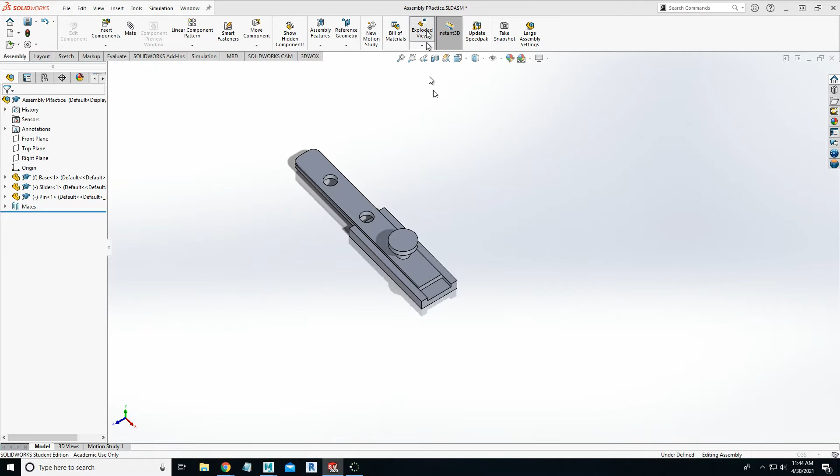So to get started, I'm going to go ahead and click Exploded View, and that'll bring up your menu over here on the left-hand side with all of your options. I'm going to start with the pin. Once I click on it, it'll turn solid blue, and you'll notice I get a triad with it. I'm going to grab the letter Y arrow and move up to where it's just barely above the surface, because that's the easiest direction to show which direction the pin is going to go in.

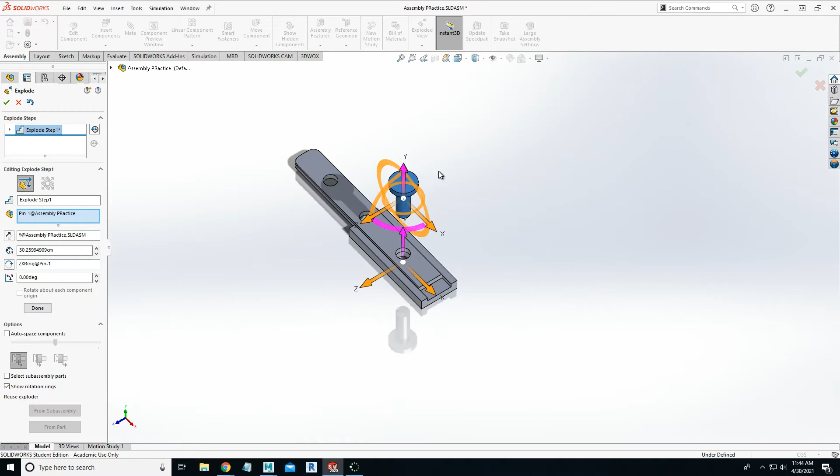Once I finish that step, I'm going to right-click and click Done with Step. That'll end it and add it to my list, and then I can select the slider. So now I'm going to click that slider, and this time I'm going to grab the X arrow, move that down this way, and once again move it just barely off the surface of the original base part. Once I'm finished with that, I'm going to right-click and do Done with Step.

So now I have 2 exploded steps, one for the pin and one for the slider. If I have multiple parts, I'll probably want to do one of these steps for each of those parts. The only one I wouldn't want to do that with is the base. So I'm going to go ahead and click the check mark here. That's going to set it, and then I'm ready to go.

I do need to have some lines though, so I can see where these things come back to, since I'm going to be putting this into a 2D drawing. So I'm going to switch over here on the left-hand side to this configuration manager, which is like 2 little white boxes attached by a vertical line. When I click on that and open up the default assembly, I can see my exploded view.

If I right-click on that, I can add Smart Explode Lines. It's going to go through and show me exactly where those things are going to go. If I like what they are, I'm going to go ahead and click the check mark and set OK, and it'll draw dotted lines to show me exactly where things move. So this piece will slide along this dotted line, and this piece will slide along this dotted line.

Now that I've got that, I can go ahead and click the Save button, and I can move into making my drawing that I can submit. So I'm going to go to File. I'm going to make a drawing from assembly.

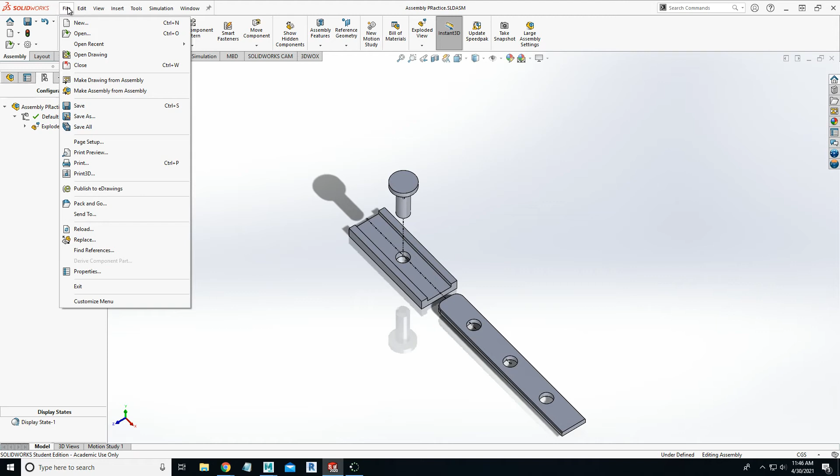Once again, if you don't see this menu at the top, there's probably a little arrow here that you can click until you see the word File, and then make a drawing from assembly. We are going to make sure that this only show standard formats is checked. If yours is not, go ahead and check it now. We're going to choose A0 in the ISO and go ahead and click OK.

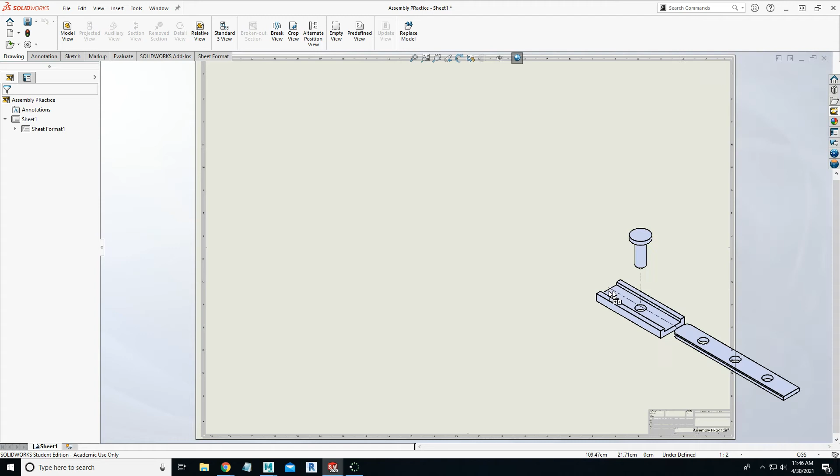And then the one that we want is this isometric exploded down here in the lower right. So I'm going to click on that and drag it out to the page. And then I'm going to place it on the page. It does not fill the page. It's not very good. It's not a good set.

So I'm going to use a custom scale. Right now it's set 1 to 2. Let's try 1 to 1 and see what happens. That's a little on the large side. I can move this by clicking this dotted line around the outside. I may want to make that just a little bit smaller. So I'm going to do 1 to 1.25.

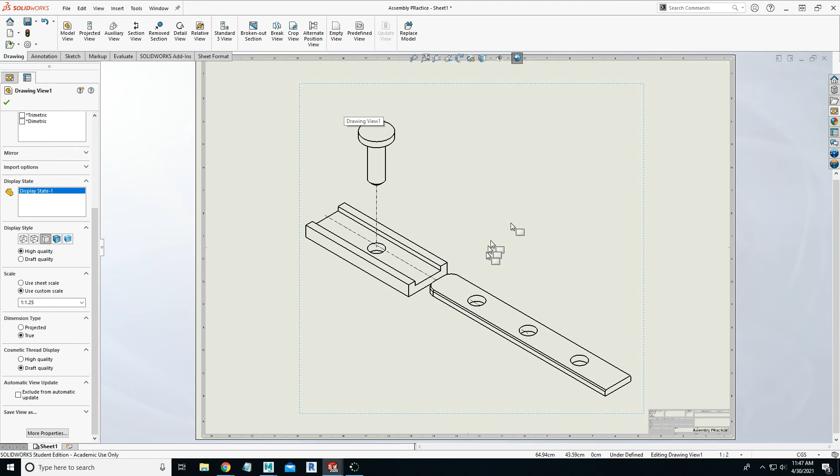Hit enter. That moves it down, and then I can recenter using that dotted line again so it's in a good place. Once you've got this ratio on the custom scale set to one that you like, and you get it centered by grabbing this dotted line, and it looks good, you can go ahead and save this drawing.

You do want to confirm everything. Click yes, make sure it's set to go, and then I would call this one Practice Assembly Drawing. Go ahead and click Save. That's going to save the drawing, so you can come back to it at a later point if you need to.

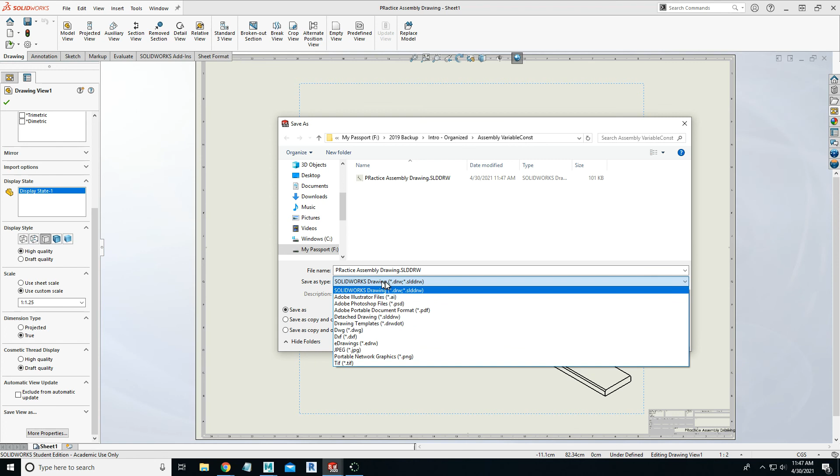And then I'm going to go to Save As and save it one more time. This time I'm going to change the file type from a SOLIDWORKS drawing to an Adobe Portable Document format. That PDF is what I'm going to upload to the assignment. You should be ready to go on your particular practice assembly. Try and do the explode view, make a drawing, save it as a PDF, and upload it.